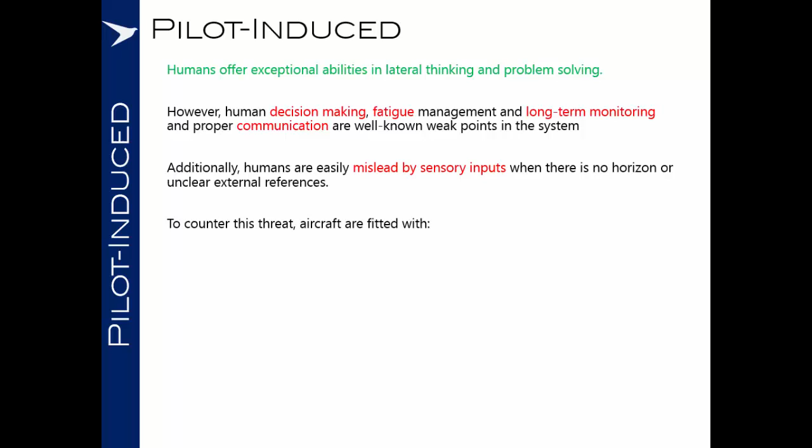Additionally, humans are easily misled by sensory inputs, and particularly this is at its worst when there's no horizon or unclear external references. So to counter this threat, aircraft are fitted with flight instruments and head-up displays, aural tones and announcements, auto-flight systems, stall warning systems, and fly-by-wire flight envelope protections. But despite all this, humans are still a major risk factor in causing upsets.

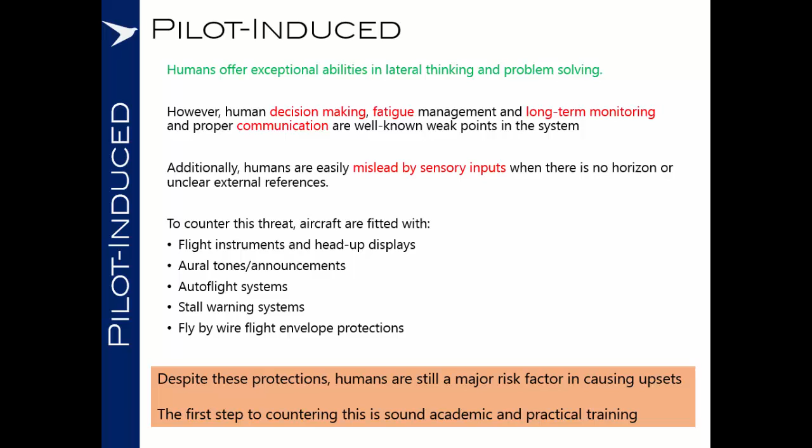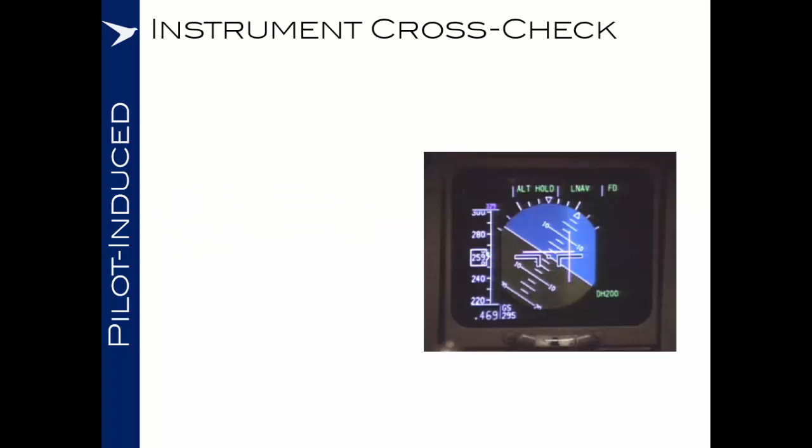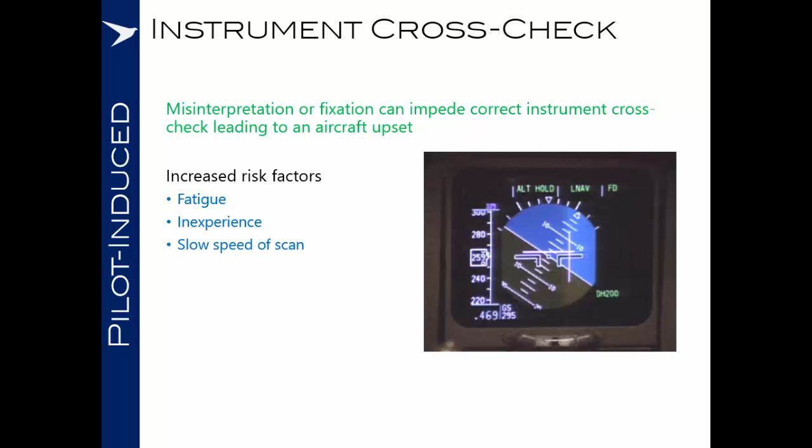So first of all, instrument cross-check. This is misinterpretation or fixation which can impede correct instrument cross-checking, leading to an aircraft upset. The increased risk factors that are associated with the instrument cross-check breakdowns are fatigue, inexperience, slow speed of scan, which can often be as a result of high workload, and the natural variation in pilot's ability.

So the key points here are that in a high workload environment, we need effective pilot monitoring, and the pilot not flying has a duty to ensure that flight parameters are being monitored closely and should carry out their own instrument cross-check, just as if they were flying the aeroplane.

In a low workload environment, we know that humans do not react well to low arousal over a long period of time, and so it may be beneficial to alternate who is the pilot monitoring at frequent intervals.

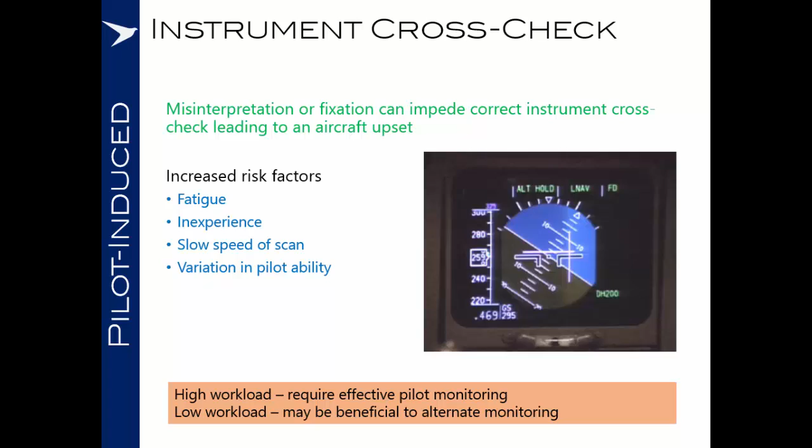Adjusting attitude and power then. Pilots need to anticipate inputs in pitch, roll, and power to effectively control an aircraft. Therefore, they must have a fundamental understanding of what they are asking the aeroplane to do and the effect that each of their control inputs will have on the aircraft.

So, increased risk factors to adjusting attitude and power causing an aircraft upset: a lack of familiarity with the aircraft in question, misconceptions about principles of flight, or a momentary distraction.

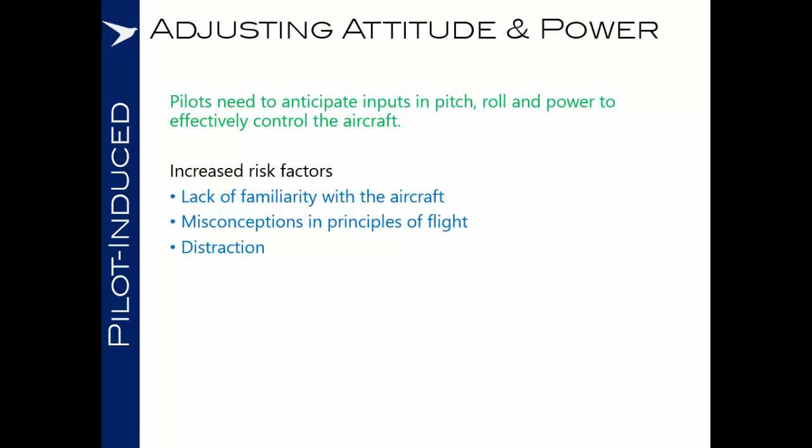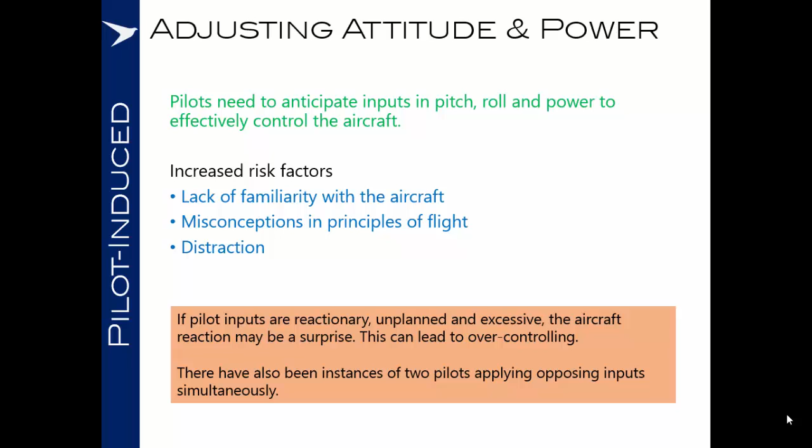So the key point here is that if pilot inputs are reactionary, unplanned and excessive, the aircraft reaction may be a surprise, which can lead to over-controlling. And there have been instances of two pilots applying opposing inputs simultaneously, which demonstrates that at least one of them has a fundamental misunderstanding as to what they are trying to achieve.

Moving on to inattention. This is typically where we have long cruise sectors and a very low arousal environment. And this holds an inherent risk of insidious onset of upsets. When the crew aren't watching the instruments, a small low rate disturbance of the aircraft or a deviation from course may not be detected instantly. As this escalates, it can lead to upsets.

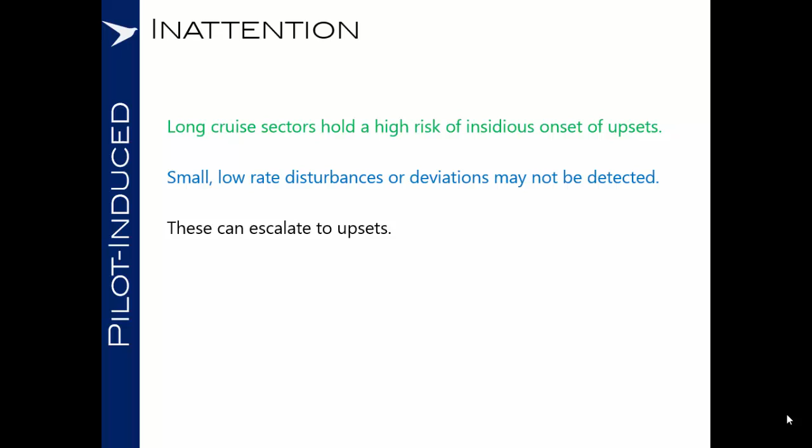It's well known that low arousal environments are not conducive to effective monitoring over long periods. So again, consider the value in exchanging pilot monitoring duties regularly.

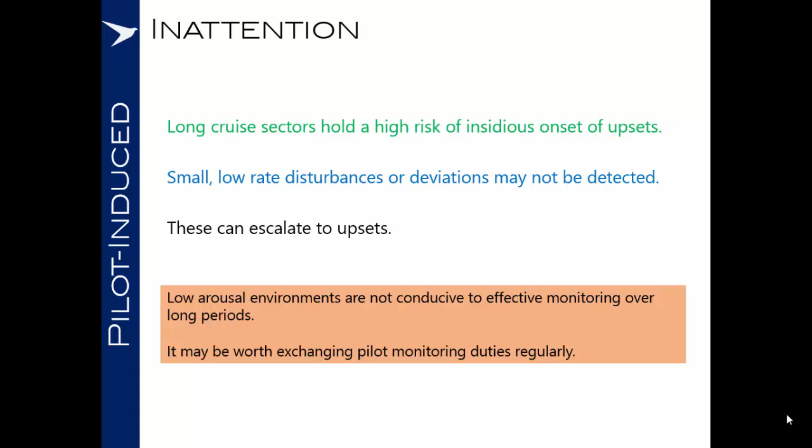Moving on to distraction. This is where we have an incorrect prioritization of workload due to external events or demands. The increased risk factors associated are engine anomalies, getting stuck into trying to diagnose a slight variation in an instrument indication whilst neglecting the primary job of flying the aeroplane safely.

Aircraft caution lights similarly can be very alluring to the crew to monitor those and deal with that crocodile seemingly closest to the canoe rather than flying the aeroplane itself. Air traffic control demands, you can guarantee that they will come at the worst possible time.

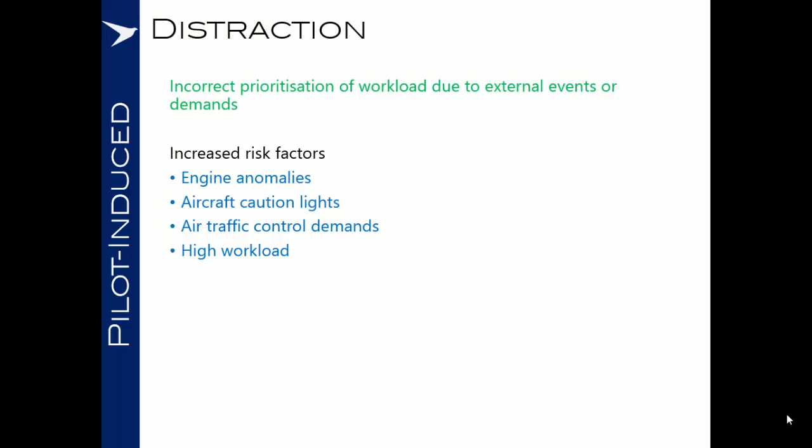High workload environments, for instance, a complex approach into a busy airport, may lead to an incorrect prioritization. So a part of the effective monitoring duty of the pilot not flying has to be in thinking about the workload. Consider techniques for verbally drawing attention to the primary duty of flying the aeroplane for the pilot flying.

This is covered at great length by crew resource management courses, so I won't labour this point, but think about questions that you could ask, such as, which speed are you going to capture?

Overall though, remember that your priorities, as you were taught in your very early days of flying, are always to aviate, navigate, communicate.

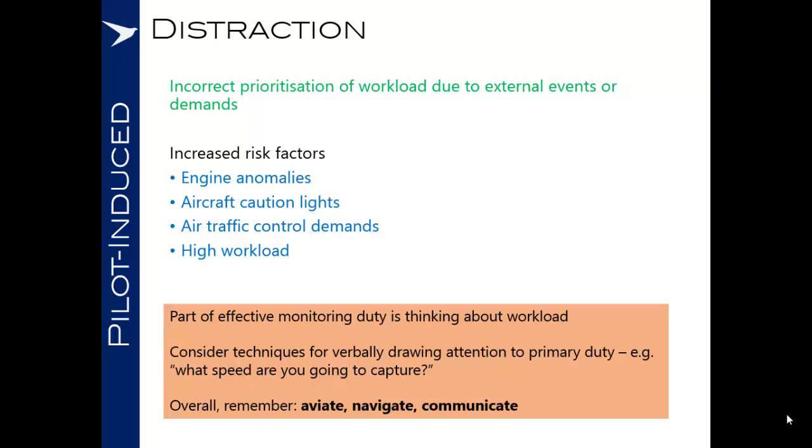Moving on to vertigo and spatial disorientation. This is the inability to orientate oneself with respect to the Earth's surface.

Somatogravic illusions, the feeling that gravity is somewhere other than where it actually is, can generate feelings such as leaning when upright or climbing when accelerating, and can mask high rotation rates.

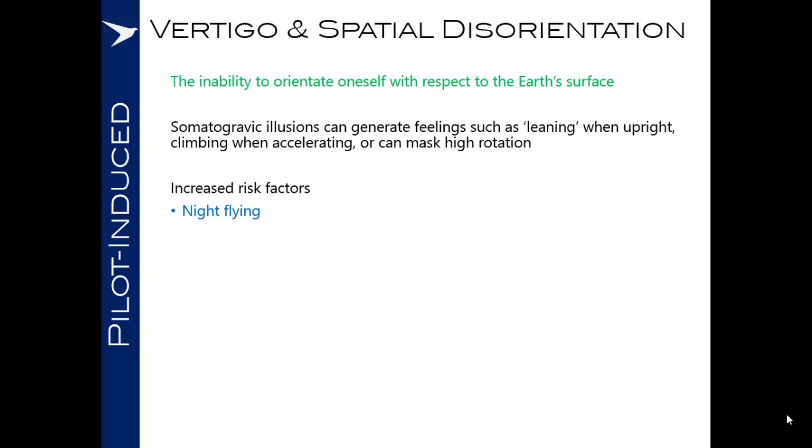Increased risk factors for this are flying at night with little in the way of external references, certain weather conditions, distraction from instrument cross-checks which have been giving you the opportunity to reorientate yourself, and also fatigue and intoxication can be key factors.

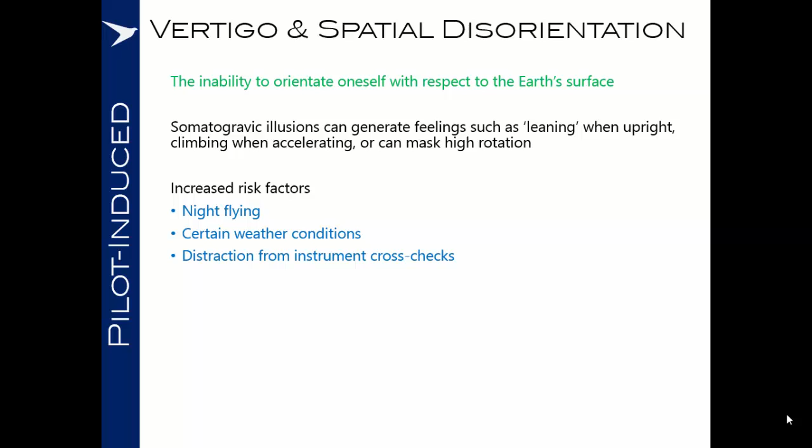Both pilots need to be aware of this risk and be prepared to hand over and take over control if the other pilot becomes disorientated, and be aware that this can happen really at any time.

Good training, flight planning and knowledge of procedures does reduce the risk because it will pre-prepare your mind as to what is about to happen to you. But overall, good instrument cross-checks greatly reduce the risk, and when disorientated, you have no option but to trust the instruments.

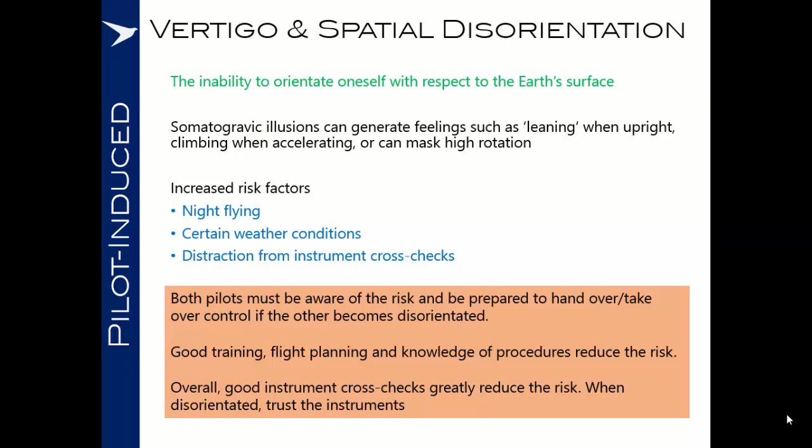Pilot incapacitation. This is the situation where one pilot has lost consciousness or become incapacitated and perhaps has impeded the control movement or is leaning on the controls. It also relates to the potential of a hijack scenario.

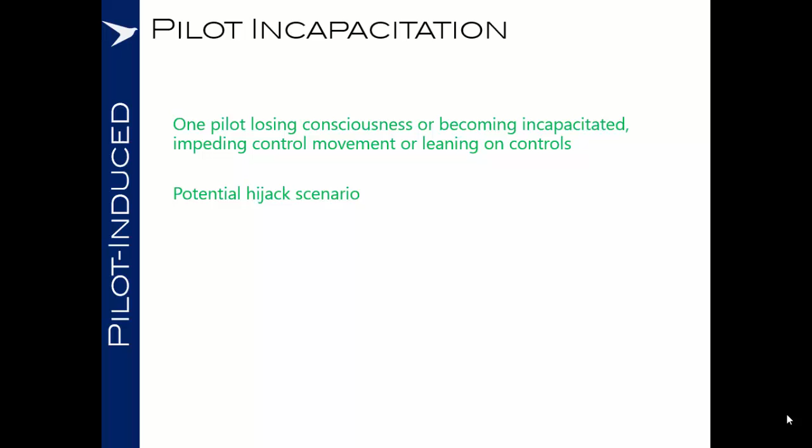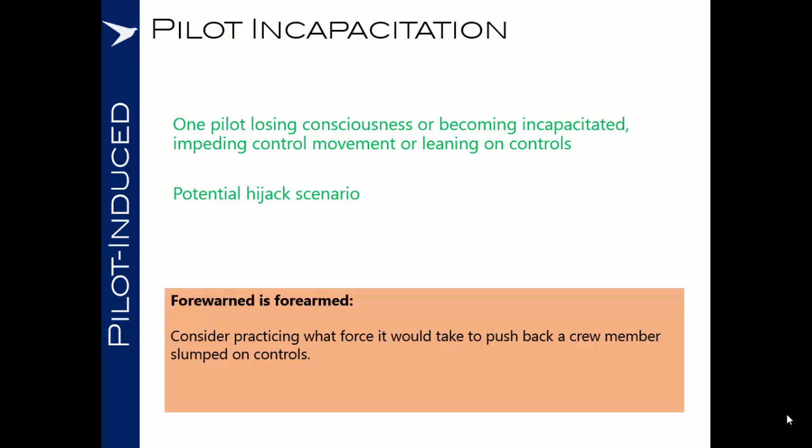Now, the most important survival factor here is that forewarned is forearmed. Consider practicing what force it would take to push back another crew member who is slumped on the controls. Can you do it with one arm whilst still maintaining good control of the aeroplane?

If not, then how are you going to handle that scenario? And bear in mind that if a pilot were to slump on the controls and inadvertently push the control column fully forward, could you still manage to maneuver the crew member or carry out your plan in that scenario?

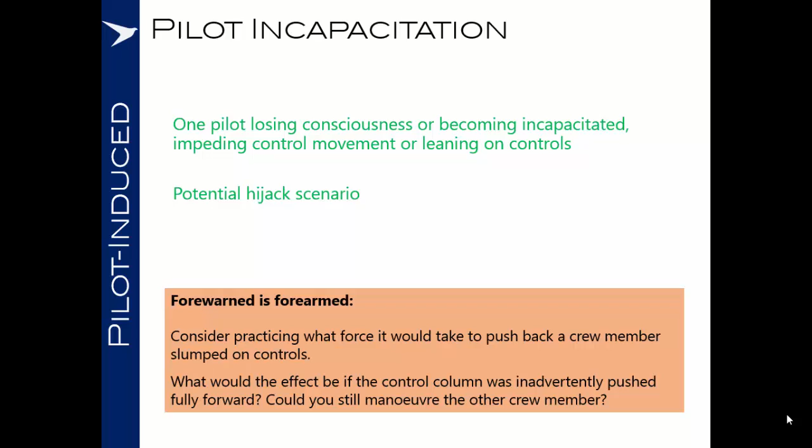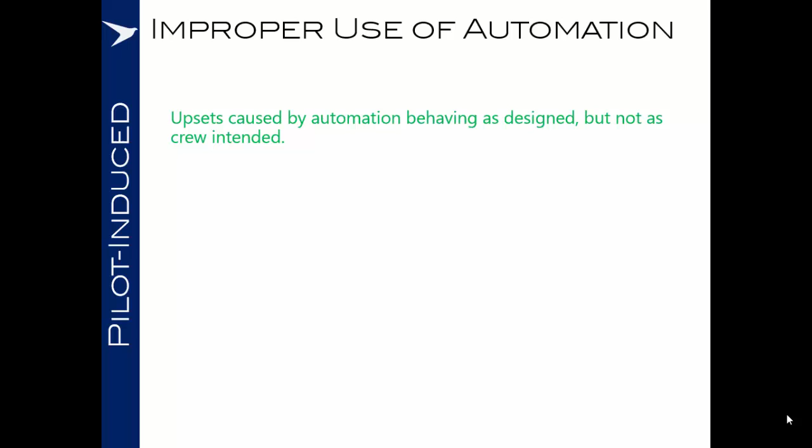Moving back towards automation, the improper use of automation is a growing concern of the industry. Upsets in this scenario are often caused by automation behaving exactly as designed, but not as the crew intended. Regulators, manufacturers and operators continue to try to find the optimum blend of hardware, software and pilot training.

But when doubt pervades, the safest route is to disconnect all automation and verify you are in a manual mode to ensure a clear understanding of the situation. Do not rely on automation to fly you out of trouble.

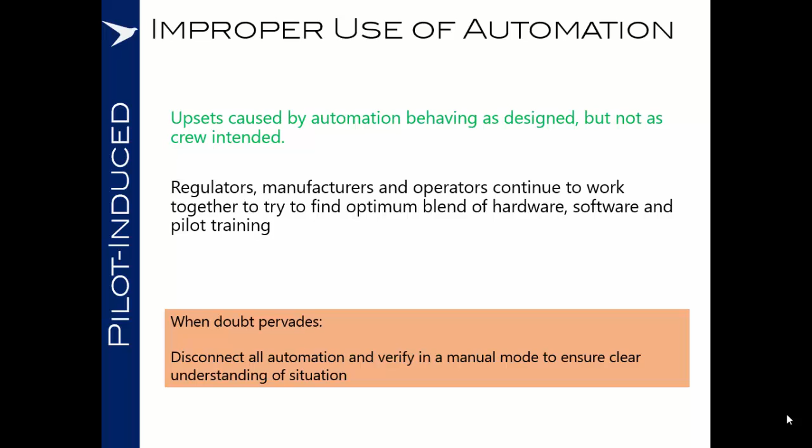Finally, piloting techniques and the risk of pilot-induced oscillation, PIO. This is where a pilot's own inputs lead to unwanted aircraft motion.

As we've discussed earlier, aircraft have inertia and there is a delay between the input and the effect of the control. Therefore, there is a risk that PIO can occur because the pilot makes an input and then feels that nothing is happening and reverses the input before the control has had an opportunity to respond. If the pilot's inputs become out of phase with the movement of the aircraft, things can magnify quite greatly.

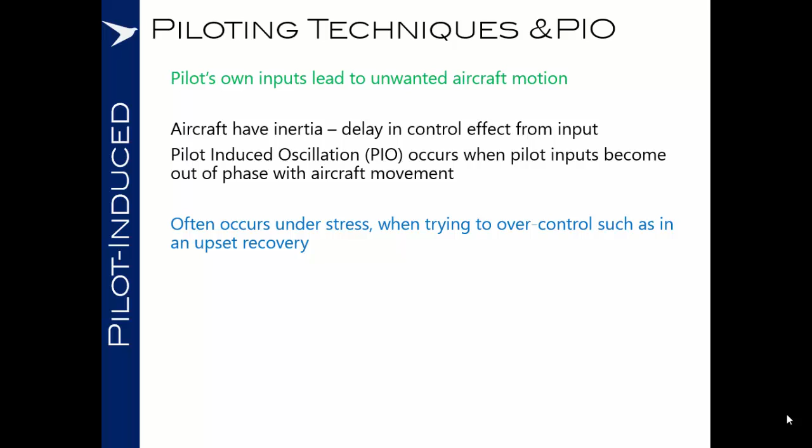Now, this often occurs under stress, and a significant risk factor is during an upset recovery, when the control inputs that you'll be making could be much larger to those which you're used to.

If you find yourself in a PIO situation, then it can be overcome by releasing and neutralizing the controls for long enough to break the cycle.

In a high-stress situation, it may not be obvious to the pilot flying the aeroplane that they are in a PIO situation. So therefore, it may be the pilot not flying who realizes first and will need to verbalize that to the pilot flying.

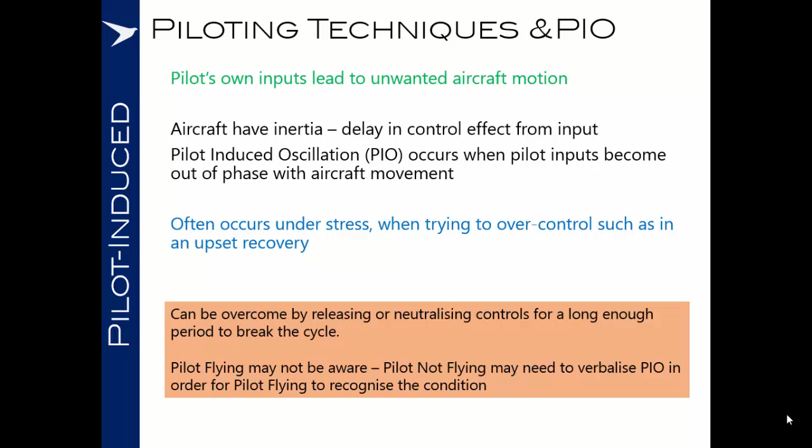In this section, we've had a look at all of these different causes of pilot-induced upsets. The fundamental messages that we can take away from this are correct prioritization of your duties as a pilot, with flying the aeroplane safely being the number one priority at all times.

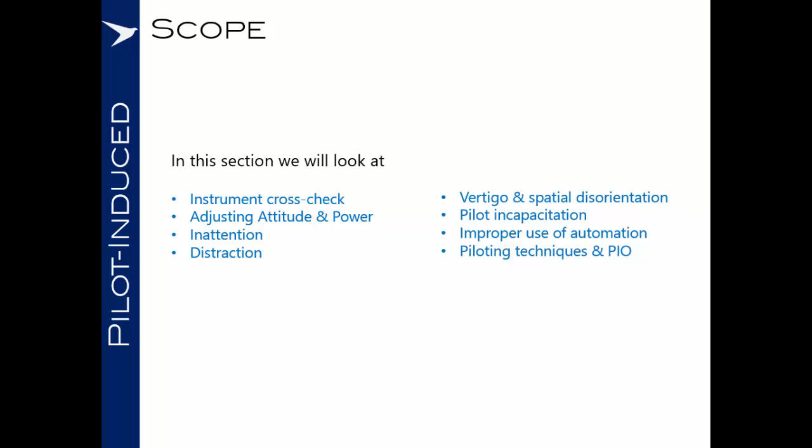Secondly, we need to ensure that we have effective monitoring practices and good crew resource management. And thirdly, that we are putting in place suitable controls over the limitations of us as humans in the cockpit. And that does not mean an over-reliance on the automation to take control.